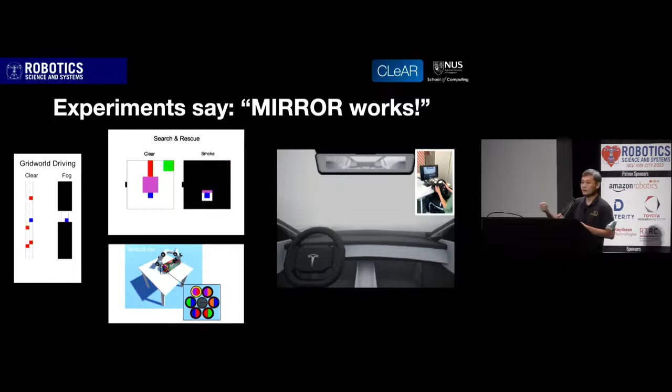My five minutes is almost up, so I'm just going to say Mirror works. We have a bunch of experiments showing that Mirror works on various domains, with simulated agents, as well as with real-life human participants driving in order to avoid collisions, and with the agent providing useful information. We are paper number 20, poster number 16. If you don't manage to catch me at the poster, you can email me or email Kai-Chi. I'll be there to answer any questions you might have about the method, experiments, as well as all the things that didn't work. Thank you very much, and I hope to see you at the poster.

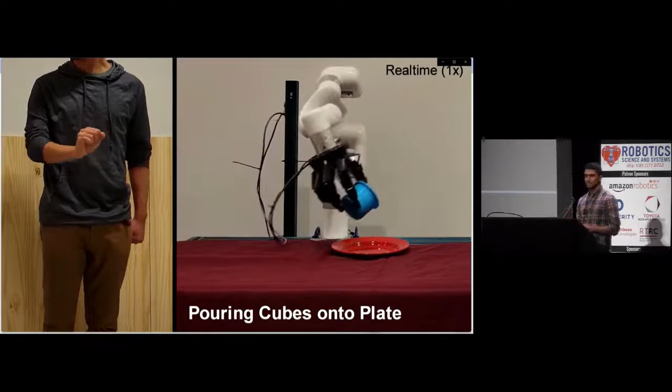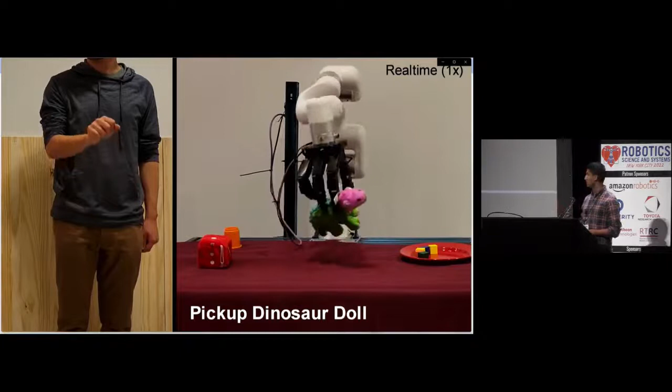Robotic telekinesis is a low-cost vision-based system that allows any person to teleoperate a robot arm and hand just by moving their own arm and hand. A single color camera captures a stream of video of the operator, and their motion is retargeted onto the robot in real time. First, let's discuss some key aspects and requirements of our system.

We use only a single RGB camera with no depth sensors or calibration, meaning in theory our system could be used with any cell phone or tablet camera. Our system must work out of the box without any fine-tuning on every operator, regardless of their appearance or hand shape. It should work for any type of dexterous manipulation task, and regardless of where the operator is located or what background they're standing against.

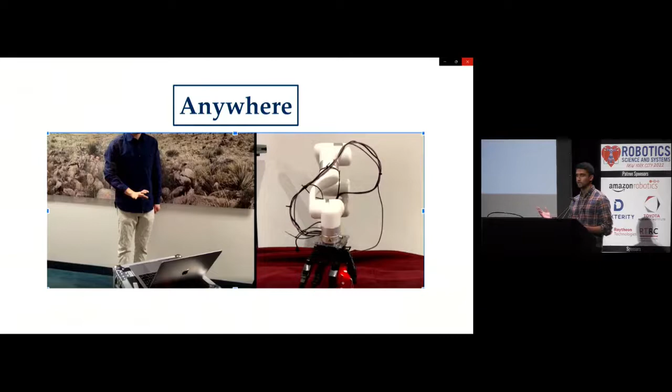Here we see an example of telekinesis being used for remote teleoperation via a video conferencing tool. But how do we train a system that can achieve these requirements? Where would we get the data that allows this level of generalization? Gathering paired human-robot poses for thousands of people, places, and tasks is totally intractable.

But we do have access to an endless supply of diverse human hand manipulation videos thanks to websites like YouTube. As we'll see, we train our system using only these human videos without any training or data collection on a robot. So first, let's look at our method.

Our pipeline starts with a single color camera that captures images of the operator. We first estimate the pose of the operator's hand and body using powerful pose estimators that are themselves pre-trained on millions of images. We then retarget the human hand pose to a corresponding robot hand pose, and we retarget the human body pose to a corresponding robot arm pose.

First, let's talk about hand retargeting. The key challenge here is that human and robot hands differ in size, shape, and joint structure, and we don't have paired human-robot ground truth correspondences. What we do have are millions of diverse human hand images that we can extract from YouTube, and we can estimate the hand poses using pose estimators. But still, we don't have the corresponding ground truth robot pose label, so how do we train a retargeter with only that data?

Our solution is to take an energy minimization approach, and this energy function measures the dissimilarity between any human hand pose and any robot hand pose. Intuitively, if the human hand pose has the thumb and index finger close together like this, we'd want the robot to do the same. The energy function formalizes this intuition, and importantly, it's differentiable.

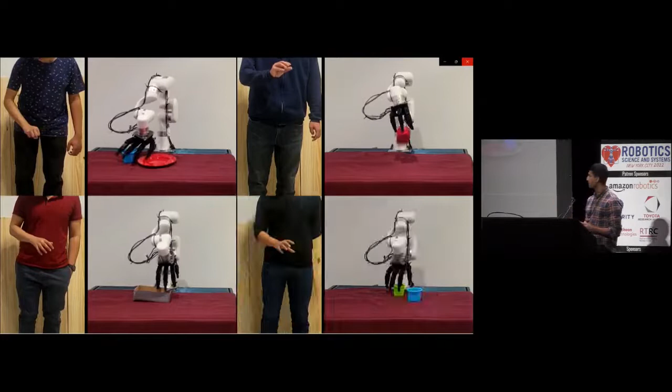And putting it all together, our pipeline starts with a stream of video of the operator and produces a robot hand-arm trajectory that's executed in real time on the fly. So here we see it in action. Here we see four untrained operators that have never used the system before, completing a variety of manipulation tasks.

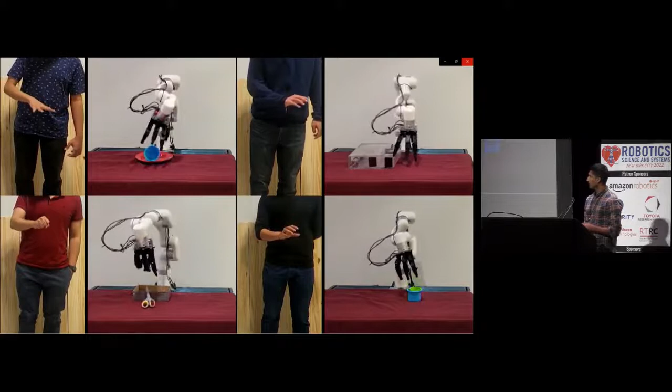And now let's discuss some of our experiments and results. So our first experiment tries to gauge how usable the system is for novice operators like the ones you just saw. The feedback from the subjects praised the usability and generalizability of our system, but also highlighted a few failure modes in retargeting that we hope to address in future work.

Our second set of experiments aims to study the trade-off between using this neural network for retargeting versus using online gradient descent at runtime. We find the speed and robustness of our network to be very beneficial, but we note that because our network learns such a strong prior over everyday hand poses, like the ones seen in YouTube clips, it can suffer on complex, rare, out-of-distribution hand poses.

We have several other experiments and ablations that I won't go into detail here, but we invite you all to check out our paper, poster, and website. Thank you for listening.

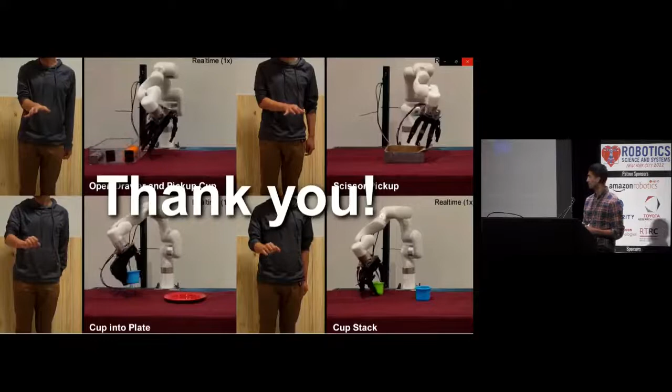Okay, good afternoon, everyone. My name is Michael Fulton. I'm pleased to present this work along with my colleagues from the Interactive Robotics and Vision Lab at the University of Minnesota Twin Cities, if the video comes up.

And this is actually a great connection with Henny's talk, because this is nonverbal communication with not very much human similarity. So we're working in the context of underwater human-robot interaction here. Underwater HRI is a field which has developed pretty quickly over the last 15 years or so, with the emergence of human-portable, human-scale, autonomous underwater vehicles. The core focus is enabling collaborative work between humans and AUVs using communication between the two.

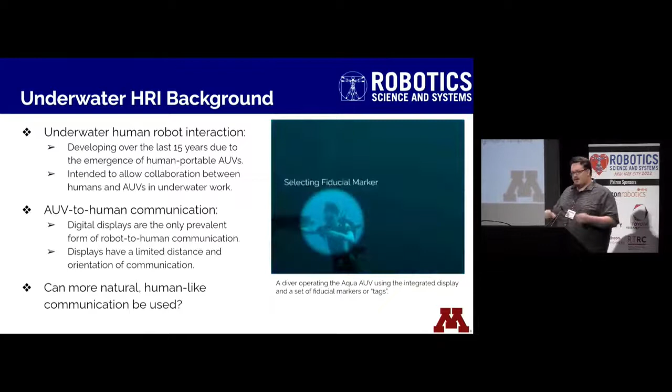So we were interested in exploring more natural, human-like communication systems that could be used at a variety of different distances and orientations. And that's where robot communication via motion comes in. So we proposed this back in 2019. We proposed RCVM, which is this method of using full-body robotic motion as a stand-in for human gestures. We call these kinemes, motion with semantic meaning.

And we discovered in 2019 that in our simulation-based RCVM, it outperformed a light-based communication baseline system. Now, that's all well and good. However, what happens when we bring things to the real world?

Real-world motion control in the underwater space is much more difficult. So how is RCVM going to perform when we implement it, as we've done in this paper, bring it to the real world, and compare it to alternative types of communication? You can see here the follow-me kineme being demonstrated on the Aqua AUV, telling the diver to follow the robot.

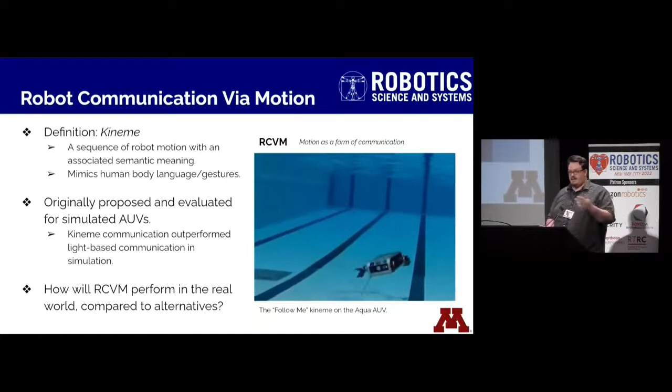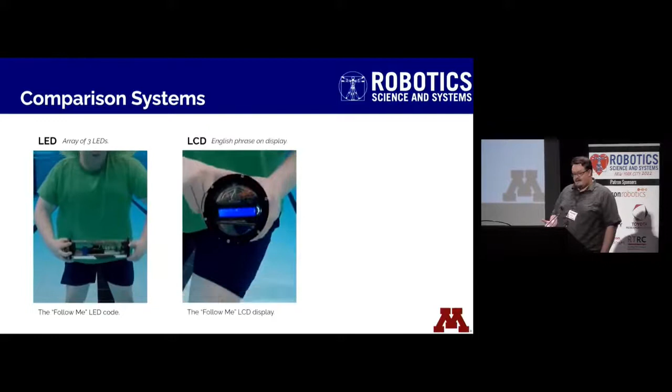Now, when I say baseline types of communication, other alternatives, I'm talking about light-based communication with an array of LEDs, integrated digital displays, as I mentioned, which are the primary method used, and then also audio-based text-to-speech communication. We used the Google Text-to-Speech API to generate phrases and play them over a waterproof speaker. See how that worked out.

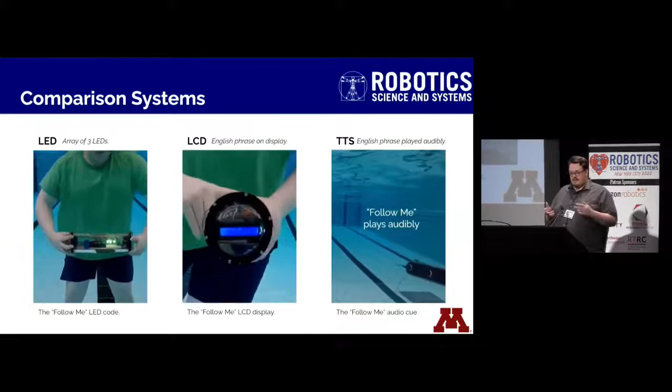So in this paper, we present two studies. The first study was an in-person pilot study where we integrated RCVM into the context of a full interaction loop. So we trained people on what the kinemes of RCVM mean. Then we had them ask the robot a question with a gesture, receive an answer via kineme, and then take an action.

Based on the actions that participants take, we can then infer which kineme they recognized, and we see, while there is a perceptible drop in accuracy from our simulated version, we still get pretty good overall kineme recognition. Now, this is excellent, but how is it going to compare to these other baseline communication methods that I talked about? And in particular, what happens when we look at RCVM at different distances and at different orientations?

And that's where our multidimensional study comes in. This is an online study due to the scope of the problem, so we recruited people on Amazon Mechanical Turk, trained them in the use of one of these 4 communication systems at an ideal communication viewpoint, and then asked them to identify phrases from that system at a different viewpoint. So 3 meters distance, 8 meters distance, 45 degrees, 90 degrees rotation from the camera.

And this is a much more challenging issue, much more difficult. Now, the main thing that we see here is that while RCVM does not outperform any of these systems at the ideal viewpoint, it is much, much more resistant to viewpoint change. The LCD and text-to-speech communication systems drop off almost immediately as soon as you take them away from their ideal viewpoint, whereas RCVM, and to a lesser extent the LED communication system, are much more resistant to change.

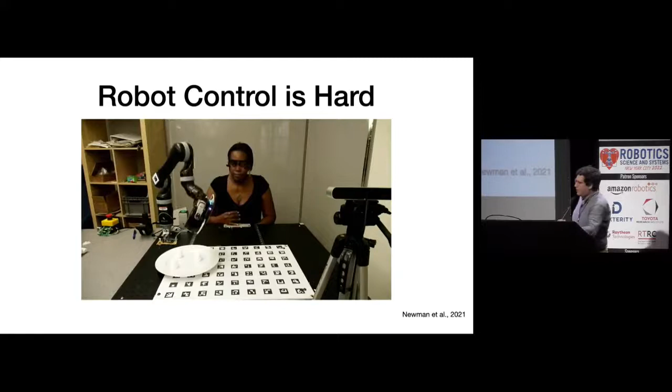All right. Hello, everyone. So I'm Reuben, and we're jumping right into it. So teleoperation is a really important control modality for a lot of important tasks. However, it's hard for people to control robots, especially for manipulation actions in high degree of freedom situations. One strategy to resolve that problem is shared control, in which the system predicts the user's goal from some of their perceived behavior and then autonomously plans a robot action to achieve that goal.

We're going to be looking at that goal prediction step, and in particular we consider 2 sources of goal information. First, the user's control input, which we will actually show is probabilistically optimal when the system is simple, but doesn't give sufficient information in more general cases. And next, we'll be looking at the user's natural gaze behavior, so where they look during the task. And we'll show that it provides complementary information about the user's goal, but it gives less reliable information. And together, they can give you a better picture than either alone.

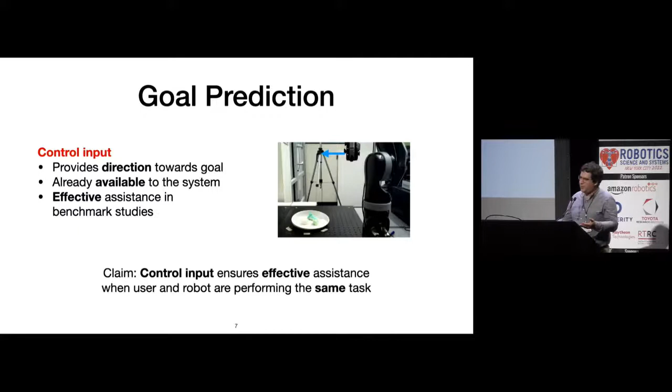So why control input? Control input is a common startup modality, mostly because it's already available to the system, right? So the user is providing a joystick input, and you already can use it. We can actually, so to understand it better, we can work through an example.

So here's a sort of example scenario in 2D. So you can imagine you have a robot at A moving towards one of the 2 goals indicated as green stars. And we'll look at the optimal robot action and the user's likely control input at a couple different points of the task. And so at the beginning, we see that both actions are towards the right, which is independent of their goal information. And so the system doesn't need any goal information to make that action.

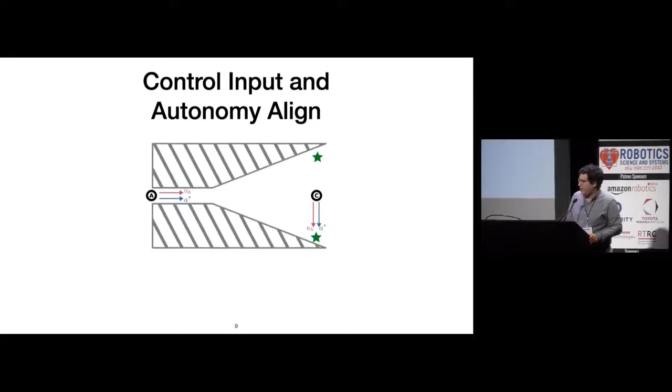In contrast, at point C, the action requires goal information to proceed, but the user gives that goal information because it's the optimal way to make progress. And we actually show that when the user is noisily optimizing the same MDP as the robot, that accounts for most of the situations. And so we can actually have guarantees on the user's behavior.

However, this doesn't necessarily extend to more general problems. In particular, when the user's input is restricted, such as during modal control, we don't have these guarantees anymore.

In contrast, so the point we look at is the user's natural gaze, and to compare the relative usefulness of each of the input signals, we ran a user study. In this study, participants teleoperated a robot using shared control-based assistance, and we used to predict their goals either their control input, their eye gaze behavior, or both combined.

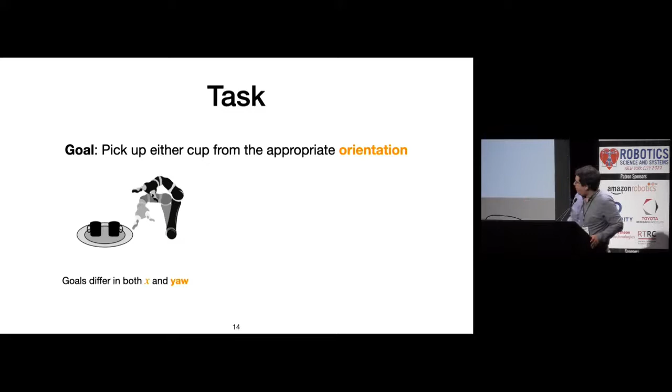To design the task, we designed a task that sort of mirrored our 2D example, in which the goal optimal location differed in both X and yaw, and users were restricted by the joystick control of the robot to only provide motion in 2 axes at a time.

We find that when the system gets early information from gaze, it improves on the task metrics because it allows for assistance in the directions of motion that require goal information to proceed, since the control input has not yet given it. However, when we combine everything together, we see that gaze does not actually improve over control input alone in aggregate, largely because gaze itself is not a particularly reliable signal, and we don't see particularly many glances towards the goal.

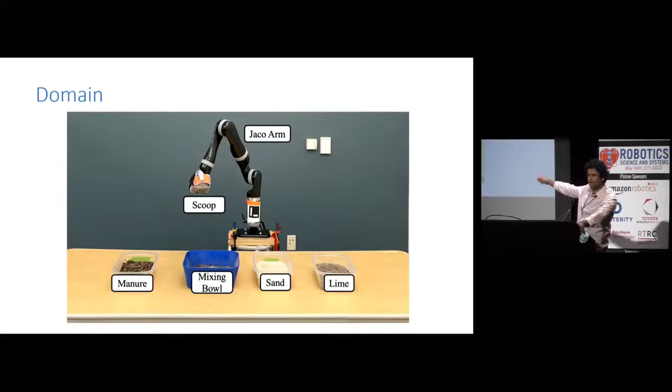Our domain is a soil mixture domain where we've got sand, lime, and manure, and the users teach the robot to create multiple ratios of these objects. The users give kinesthetic demonstrations for subtasks that they can then chain to solve larger problems in this interface, and they don't need to use abstractions at all—they can directly just give an end-to-end demonstration.

So the type of demonstrations that users can give are end-to-end demonstrations where they do not use any abstractions at all, or they could use some sort of object-based abstractions when teaching the robot, which don't have any preconditions or contact specifications. Finally, what we care about are task-based abstractions that have the highest amount of generalizability. So we created an abstraction score that grades these levels of abstractions that users provide to robots.

To study this problem, we conducted 2 user studies. In the first experiment, we provided users with a baseline condition which just had a single task setup, which was followed by a multitask setup and a phase with a lot of internal repetitions to see if people use abstractions when teaching robots in those 2 conditions. And finally, we just gave them written instructions to teach TAMP-based subtasks to the robot.

We noticed that people did not do well in teaching TAMP-based abstractions over there, so we conducted a second experiment where after the baseline condition, we had an analog video of an analog task like block stacking, and we showed them a debug demonstration of the task that they were teaching the robot, followed by an expert video task.

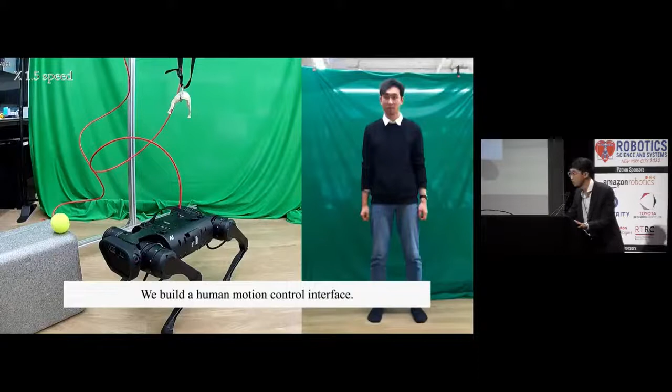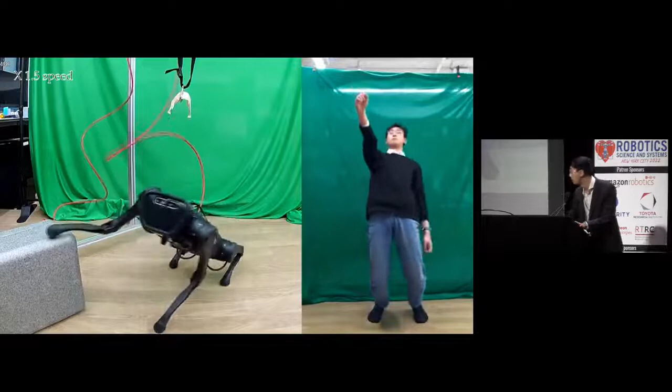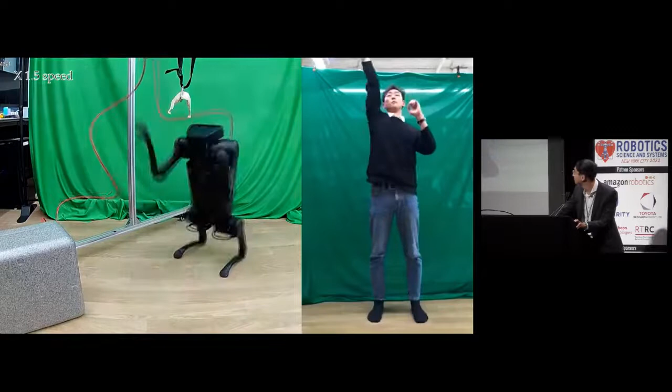Here's the illustration of the proposed human motion control interface. First, the user aims to hit the ball. Notice that the ball is located higher than the standing height, so the user tilts his body while manipulating his arm. The hanging bone is even higher than the ball, so the user controls the robot to sit to reach the target. Moreover, the user can perform reactive controls such as touching a flying ball.

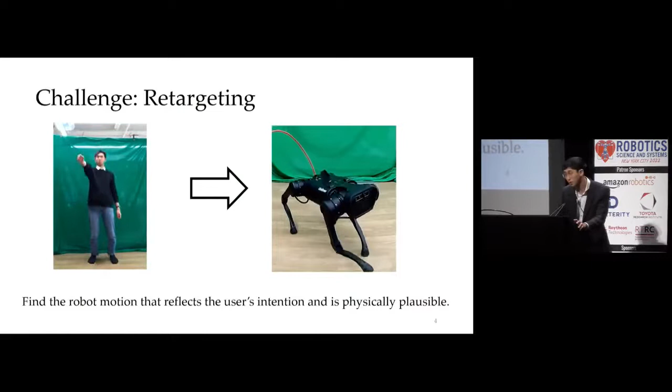In our system, the main challenge comes from the morphological difference between the human and the robot. We should find the robot motion that reflects the user's intention and is also physically plausible. Our system consists of three main components. First, the retargeting module maps the captured human motion into the robot's kinematic space. Then the control policy learns to track the retargeted motion in the physics-based simulation. Finally, we apply domain randomization for better real-world deployment.

First, I'll explain the retargeting module. Previously, we often tackled motion retargeting using feature-based approaches that optimize poses depending on predefined rules. However, they require complicated calculation, which is not suitable for real-time application. On the other hand, data-driven approaches are less costly at execution and also provide additional flexibility. We take the idea of supervised learning to build our data-driven retargeting module. Our neural network acts as the retargeting function, providing agility and flexibility. The loss function is designed to minimize the difference between orientation, joint angles, and the end effectors.

However, the learned function often generates physically invalid motions, leading to control failure. To handle this issue, we correct the consistency as post-processing. We first correct the contact consistency by predicting contact flags and fixing unnecessary foot skating. We also correct the temporal consistency to prevent abrupt joint movements. As we can see here, both corrections are essential to maintain physical validity.

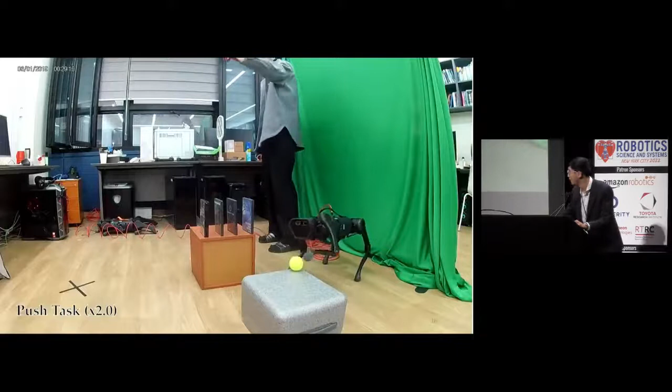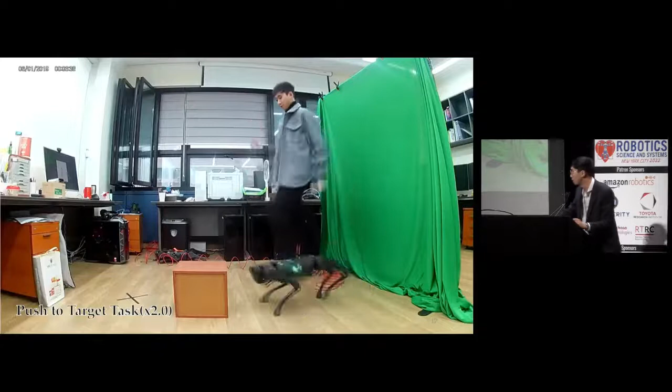We can perform various tasks using our system. As we can see in this video, the user can push the tennis ball and the dominoes. In this mission, we aim to push the box to the target location. Initially, the box is too far from the robot and not reachable. So the user controls the robot to walk and push the box repeatedly to locate it on the target position.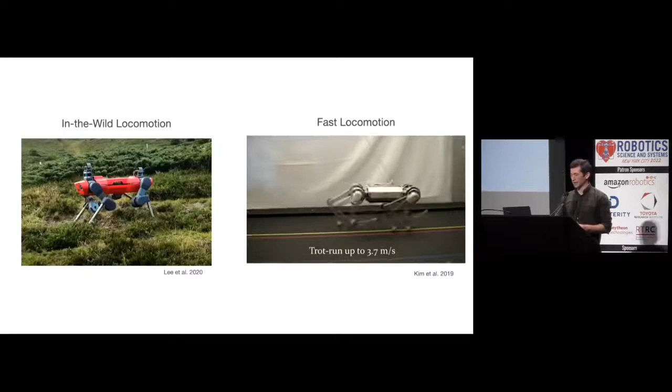Recent work has yielded dramatic improvements in robotic walking in the wild. This line of work predominantly uses reinforcement learning coupled with domain randomization to yield policies that are highly robust to disturbances. Other work has demonstrated running at high speeds. High-speed running controllers developed in the past few years have mostly been handcrafted rather than learning-based. However, neither have matched what we've seen in nature, that is, animals that are capable of achieving high speed on natural terrains. We ask what solutions can scale to solve this combined problem.

Locomotion in the wild is hard due to dynamic variations that are not present in a laboratory. The robot's feet may sink or slip into the ground. Geometric variation in the terrain also impacts the robot's motion. Fast locomotion imposes a complementary set of dynamic considerations that are not present at low speeds. These include operation at actuator limits, the regulation of high contact forces, and body control during flight phases. These factors compound the system complexity.

So, how does existing work address locomotion in dynamically complex settings? One approach is to implement targeted improvements to hand-designed models used in analytical controllers. Existing approaches can compensate for terrain compliance, flight phases at high speed, or terrain geometry. However, integrating these systems while adhering to a computational budget is a challenging engineering task. A promising alternative is to use reinforcement learning. Rather than relying on a human to design a computationally efficient model for a complex phenomenon, we can attempt to directly optimize a policy through interaction with the simulator.

In this work, we take lessons learned from in-the-wild locomotion and apply them to high-speed running. The inputs to our neural network policy are raw sensor readings, past actions, and the desired linear and angular velocity of the body, or the command. The policy operates in an action space of joint angles. This keeps our system simple to deploy and avoids any unnecessary constraints on its motion.

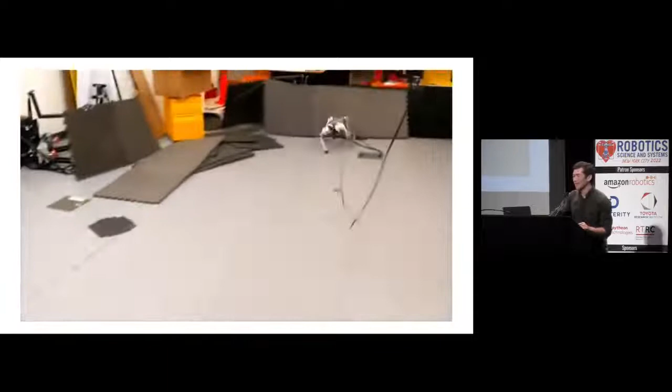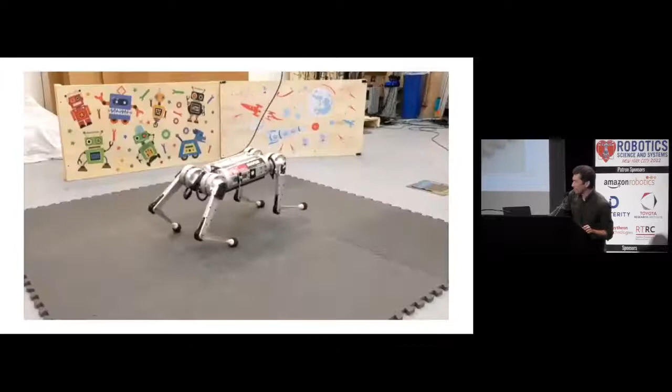I'll conclude with some videos. This video shows a max speed test of our end-to-end learned controller. It sustained a top speed of 3.9 meters per second, slightly faster than the previous record held by a handcrafted controller for this robot. The same controller can also spin at speeds comparable to the fastest handcrafted controller.

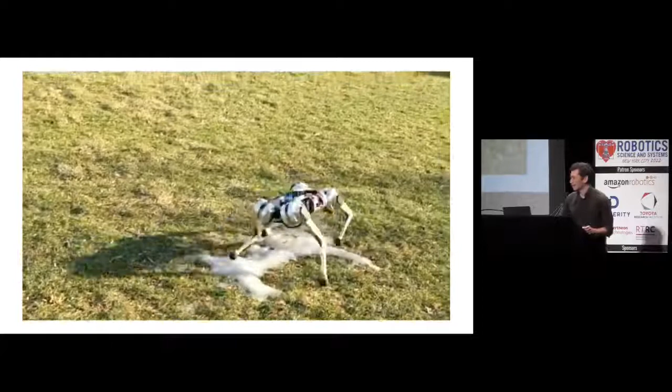The benefit of reinforcement learning really shows when the robot is taken outside of the lab. Here it spins on an icy patch as its feet constantly slip. It averages 3.4 meters per second for a 10-meter dash across uneven grassy terrain.

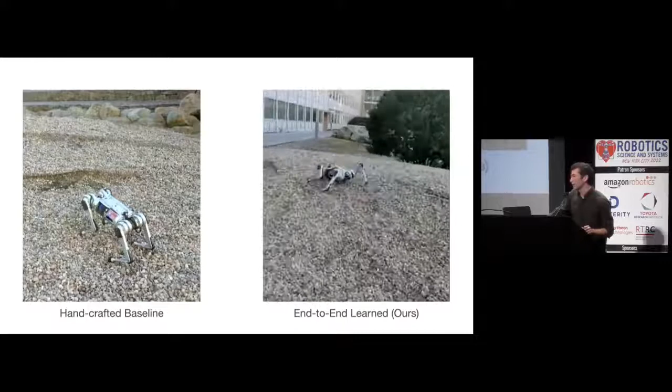A baseline MPC controller fails on this challenging gravelly hill that is both sloped and granular. Our controller moves in an unintuitive way, but makes it up the hill, and does a little spin at the top.

So we'll be showing a live demo of our controller at the Contact Workshop on Friday. Thanks for listening.

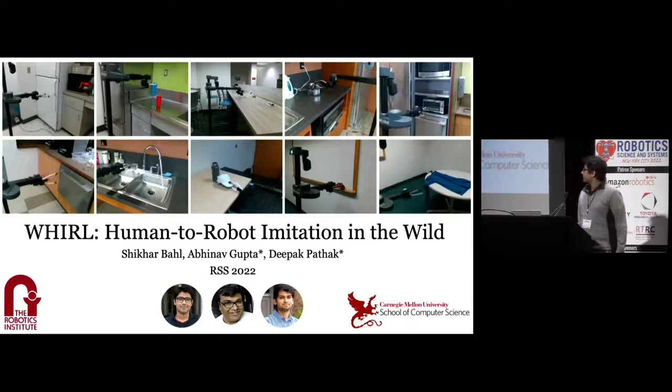Consider these cooking videos. Can we teach robots the same skills from watching humans? We aim to answer this question in our paper. Our work consists of directly learning from human videos in the real world without training in simulation.

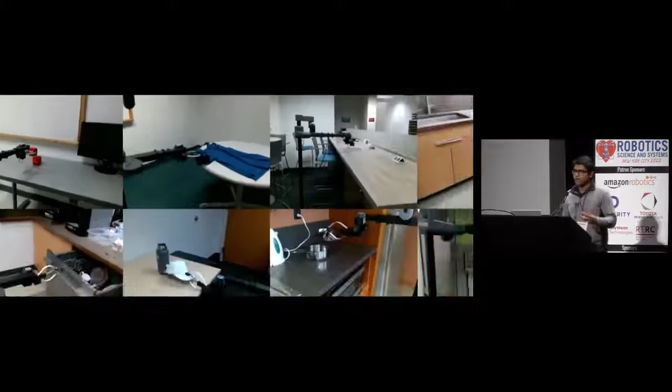The key idea is to extract priors from these videos and then improve and explore around these in the real world. Our work scales up to many different tasks in the wild. In fact, we performed 20 different day-to-day tasks that we found all around campus, as you can see here.

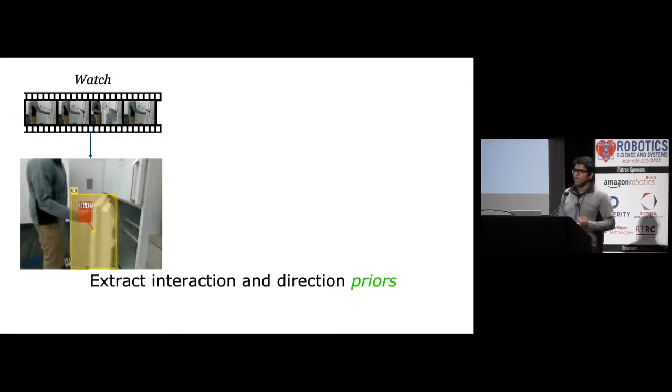Now let me walk you through how this approach actually works. Firstly, the robot watches videos of humans performing different tasks, like opening a fridge. From these, we can extract information about hand-object interactions, as well as hand motion.

We call these our human behavior priors. Using simple 3D computer vision techniques, we define a mapping function to the robot's end effectors, and then we execute this in the real world.

Now, you see that the robot gets close to opening the fridge, but it does fail. So it needs some practice in the real world. This is the repeat stage of our method.

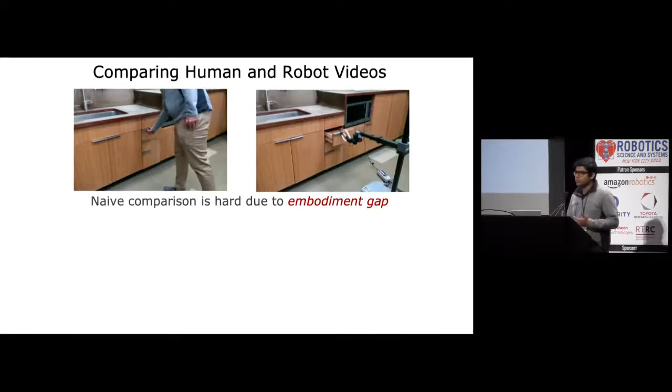But given all of this repetition, how does the robot actually improve? In order to improve, the robot needs the human video to guide this. But consider these drawer opening videos. We can't really compare them well in feature or pixel space because there's a large embodiment gap.

However, if we mask and in-paint the agents out of the video, we can actually do so. Thus, we build an agent-agnostic cost function using human and robot in-painting videos. We use this agent-agnostic cost function to improve the policy in the real world in an efficient manner.

In fact, our policy consists of two different submodules. Firstly, a task policy aims to minimize the agent-agnostic distance between human and robot videos. But in order to not be too close to the prior, we encourage the robot to try new things using

an exploration policy. The goal of this exploration policy is to maximize the agent-agnostic change. More concretely, this is the visual change in the agent-agnostic embedding space.

We call our approach WHIRL, or in the wild, human imitating robot learning. To summarize, we first compute 3D human priors, we project these to the robot's action space and execute them in the real world. We use a change-based objective to perform exploration, and then we improve our policy using our agent-agnostic cost function as well as our exploration metric.

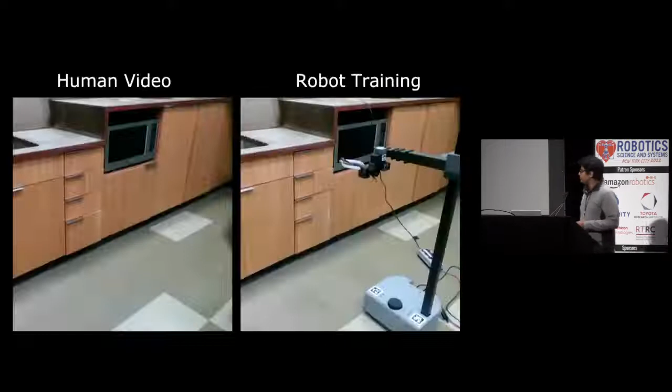Now, let me show you an example of WHIRL in action. On the left, we have a human video as input, and on the right, we show a time-lapse of the training procedure for our method.

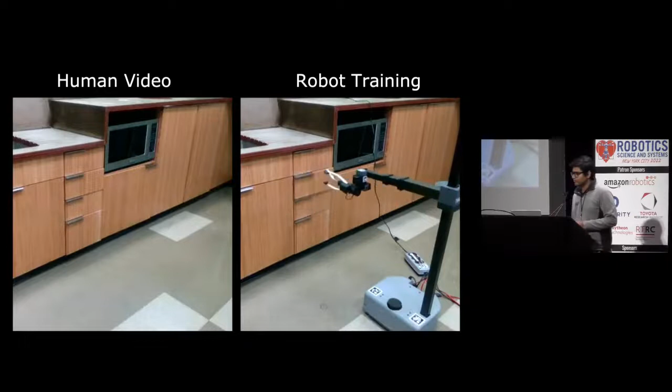Using our sampling-based optimization strategy, within about 60 episodes or 1 to 2 hours of training, WHIRL learned to solve the task pretty well. In fact, even within a couple of iterations, we see a drastic improvement in performance. We use the same sampling-based optimization strategy to optimize both the task and the exploration policies.

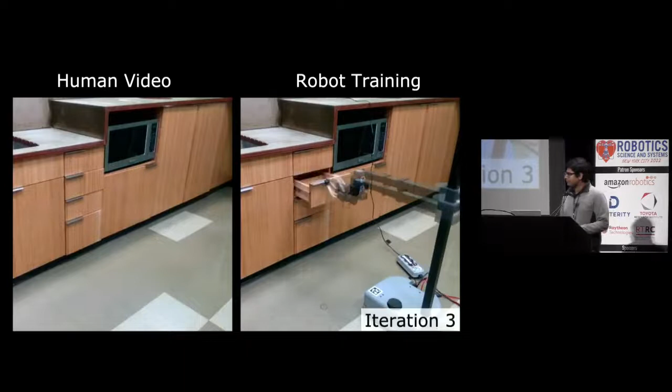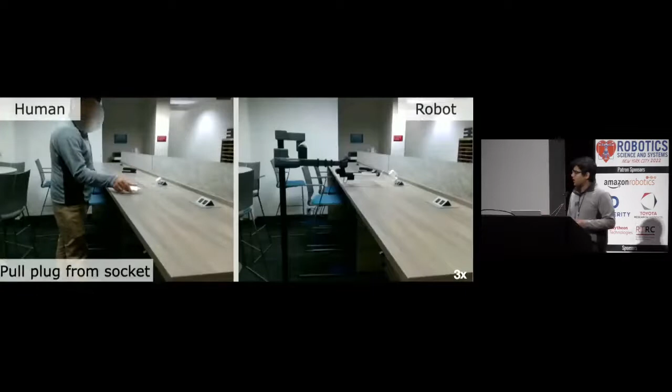Now, let's look at some results of WHIRL applied to many different settings. As I mentioned earlier, we performed 20 different manipulation tasks in the wild. Videos of all of these are available on our website, and here I've shown you a subset of these.

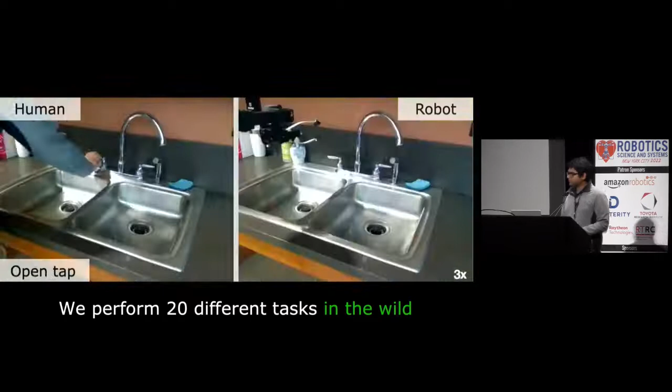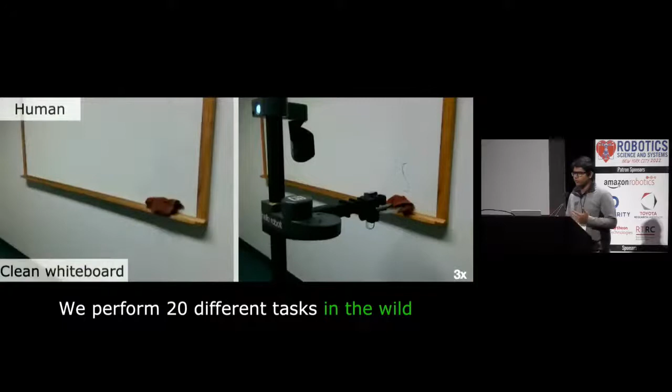For each of these, the robot only gets a single video of the human performing the task, and then we run WHIRL for about 2 hours. Note that the camera angle between the human and the robot video don't have to be the same, as well as the starting position of the robot doesn't have to be the same as that of the human.

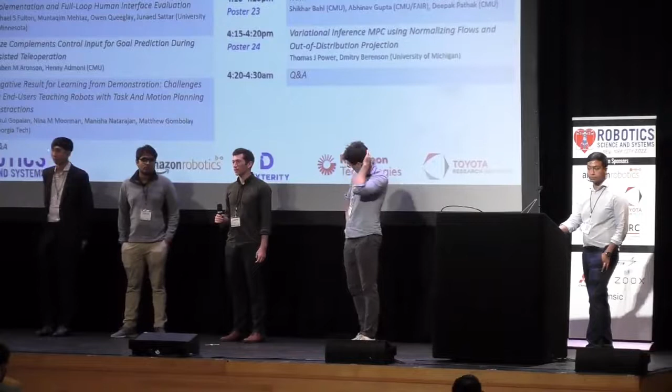Yeah, great question. So right at the start of training, we don't know what the boundary is, and we don't manually derive that from the physical constraints. We're just growing the distribution of goals by adding goals as nearby goals achieve high reward during training, and it naturally converges to agree with this physical feasibility boundary.

Yeah, okay, thank you. Go ahead. Cool, I have a question for the author of WHIRL. I wonder how is a reset of the environment handled during the robot exploration phase? And also, how can we change the system to make it, for example, robust against viewpoint changes?

Oh, great question. So for reset, for now, a human has to do it, but this is part of future work we're working on, how to autonomously select goals so that the robot can go out and practice, so that it doesn't need to reset. For example, you can imagine watching somebody for multiple hours in their kitchen, and then you can sample many videos, so you don't have to sample the same video of the same drawer being opened. And for handling multiple viewpoints, you can either try to train a model that can handle multiple viewpoints, so your policy could be trained on multiple robot viewpoints, or we can try to use more robust off-the-shelf computer vision models as well.